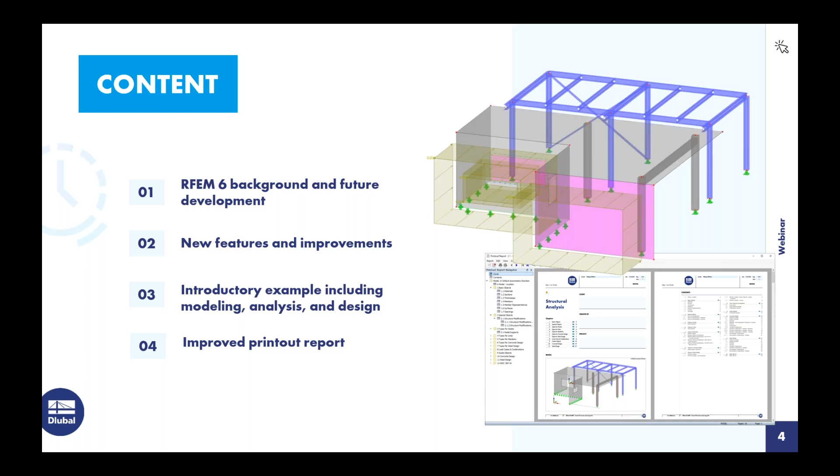RFEM 6 was released several weeks ago. It was actually developed in parallel over the past several years with RFEM 5 as well. Now, this new program generation isn't just a minor modification of RFEM 5. Actually, we have completely rewritten the program in a modern framework programming language. This is C++ with Qt. So this first release will certainly include a lot of new features, but I do want to be clear that not all of the capabilities of RFEM 5 are yet developed for this first release.

In particular, this might include glass design, cross-laminated timber, some BIM integration. So what we plan are several release phases for this ongoing development that you can expect in the coming months. What this also means is that you'll have frequent access to updates in the Dlubal extranet account. For current customers with RFEM 6 and a valid service contract, we're coming out with these updates almost weekly now because development has been so heavy and rapid with this new generation.

However, we plan to fully support RFEM 5 for this 1 to 2 year overlap period. We definitely recognize that there's many users who need the capabilities for cross-laminated timber, for example. So you can continue using RFEM 5 as you would as normal. Again, we'll continue fully supporting that until those features are available in RFEM 6, then maybe you want to consider upgrading.

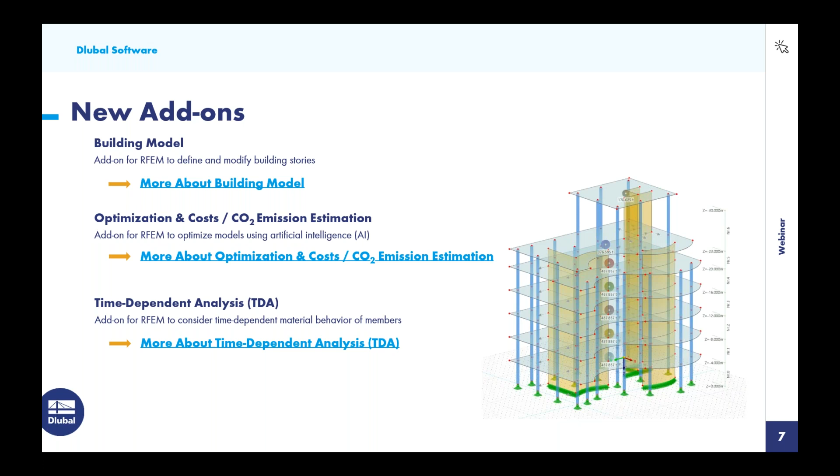To begin, we have a much better integration of the add-ons within the main program RFEM. Previously in RFEM 5, we would complete the full analysis, then move into the design portion. Now we're able to do both the analysis and the design within one workflow for a much more efficient process. You'll also see the output of design formulas from the relevant standards.

Member and member set representatives, which you'll also see in today's example, allow us to group members together. Instead of setting individual settings for each member, we can now group them together to set input such as, for concrete, the reinforcement for an entire set of columns, or for beam design according to the AISC, I can set my unbraced lengths for a group of members.

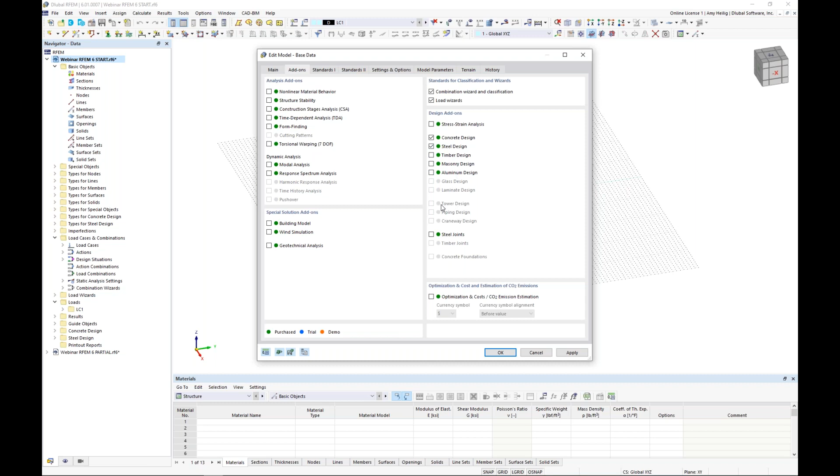For today's example, I've turned on the concrete and steel design add-ons. Some of these others that are grayed out just mean that they are in development and will be released in those future phases that I discussed earlier.

Under the Standards tab, because I have activated both the concrete and steel design, we now want to select our standard here. This is one thing that is significantly different as well. When you purchase the steel design or the concrete, timber, aluminum, and so on, you now have access to all standards. So under steel, you have access to the Euro code, the American code, Canadian, Chinese, and so on. Same concept for concrete, as we'll see here within the dropdown.

Now the load cases and combinations, this is automatically included with RFEM, so we can select one of the given standards here. Today we'll be utilizing the ASCE 7.

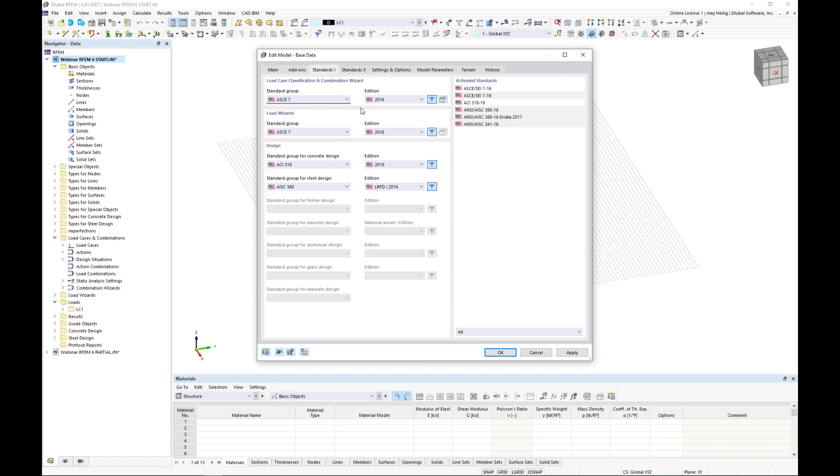Under the settings and options, this is where we would want to modify our global axes. I'm going to orient my Z axis upward, and my local axes for my members and surfaces, my local Z will be oriented upward as well.

Once we have defined all of this information, we are now brought into the main program. So we have our graphical interface here, our tables to work with down at the bottom, our project navigator, and our tools up at the top. A lot of similarities to what we saw with the previous version.

As we move along today with modeling, I'm going to point out the differences as well. You'll also notice that I'm working in a white background. When you first install, you'll find that it's actually a black background. Under options, display properties, you can control any of the colors, the font sizes, the element sizes within this dialog box.

Down at the very bottom, you can quickly load a dark background or a white background. Also at the very bottom of the screen are our grid settings. I can right click and edit this, and I've set my grid point spacing to 1 foot, and I've also set this to 50 feet on either side of the origin.

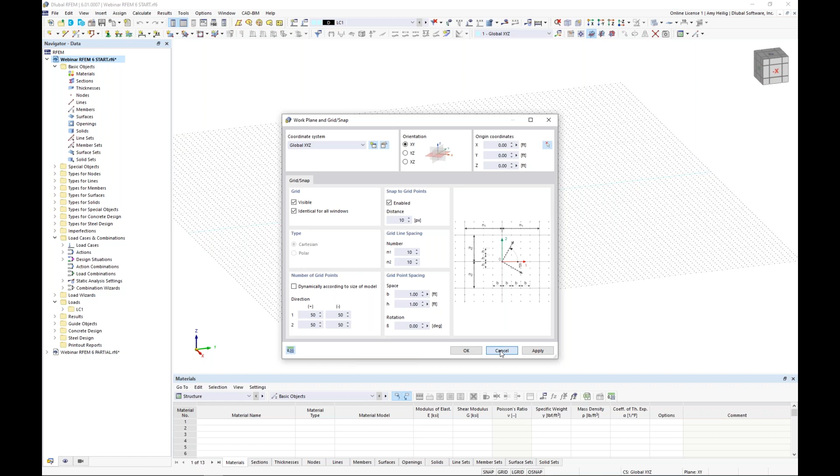Now, if we're working in a much smaller scale, let's say an FEA of a connection, we'd probably want to change this to inches, which we can access through our units and set the grid point spacing to something much smaller. Our O-snap settings, or object snaps, might be familiar from AutoCAD, where we can turn on and off different snap options, such as perpendicular, parallel, quarter points, and so on. So let us begin today by creating several nodes.

I'm going to go up to my toolbar to create my first node, and I can either select any point within my drawing grid here, or automatically put in the coordinates such as 0, 0, 0. I hit enter on my keyboard. That node is hidden here at the origin behind these axes, so we'll just have to trust that it's there for now.

The next node will be 19.5, 30, and 0. I hit enter. We can see that generated over here.

The third node is going to be negative 18.5, 15, and 0. Be careful not to move my mouse out of this dialog box, otherwise the program will automatically snap to where my mouse is currently located. So we input in that third node here, and we can right-click to exit.

So I'm going to draw my first surface, and I will go up to my tools to create a new rectangular surface. The stiffness type is going to be set to standard. Now this is something a little different: we're going to create a new thickness, and this thickness, if we launch this dialog box, will be set to 8 inches.

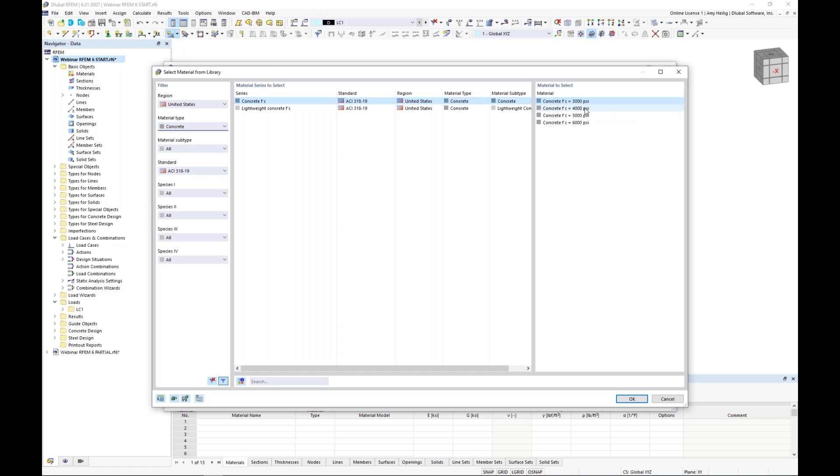We can visit our material library, and I can take advantage of my filters on the left to filter to the United States. The material type will be set to concrete, and I can choose the ACI 318 2019, normal weight concrete 4,000 PSI. Now you can see that material is set here. I click OK, and we can see the thickness and material are both generated.

Notice there are several tabs up here at the top. This is the new concept that the design portion is integrated within the main program. All of these tabs are specific to the reinforcement according to the ACI for this particular surface. In reality, we'd probably want to define this input data as well, but for now, for the sake of this example and workflow, I'm going to turn off my design properties. I'm only concerned with the analysis right now. We'll revisit this at a later time.

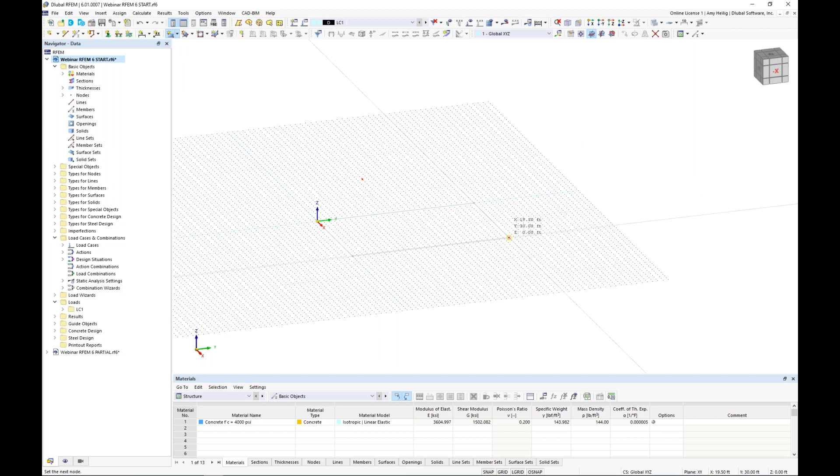I click OK, and I will snap from this origin point down here to my second node, and I'm going to do the same concept for my second surface. Now I have two continuous surfaces here. Realistically, this is the same as modeling one surface, meaning we'll have full force transfer between these two surfaces.

But if I wanted to clean up the model a little bit to truly create one continuous surface, I'll use this tool to connect my lines or members. I'll highlight over this node here to break apart this line, select this line, and hit delete on my keyboard. So now I'm just left with the boundary lines of what will be my surface.

So instead of creating a new rectangular surface, I now select my boundary lines. I do not need to redefine my thickness or material; it's already available within these drop-down options. I turn off my design properties, click OK to highlight the lines, and now we can see that we have one continuous surface here.

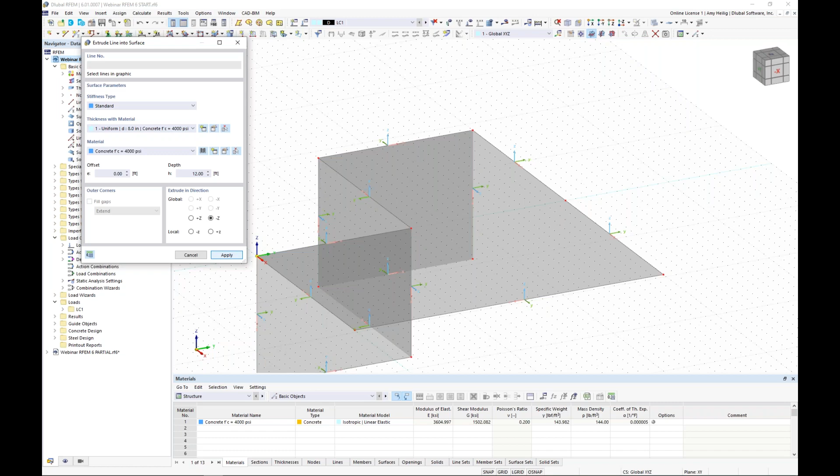I'm going to take these three lines located at the upper portion of this surface. I can right click to take advantage of this tool, extrude the line into a surface for my wall elements. I'm going to extrude this in the negative Z direction, 12 feet. You'll notice that my material and thickness can also be set here from my previous options, and now we have our wall options.

I'm going to hold down my control key to select these three walls, double click to open them, and turn off the design properties for now of these wall elements as well. So notice all of those additional tabs are now gone.

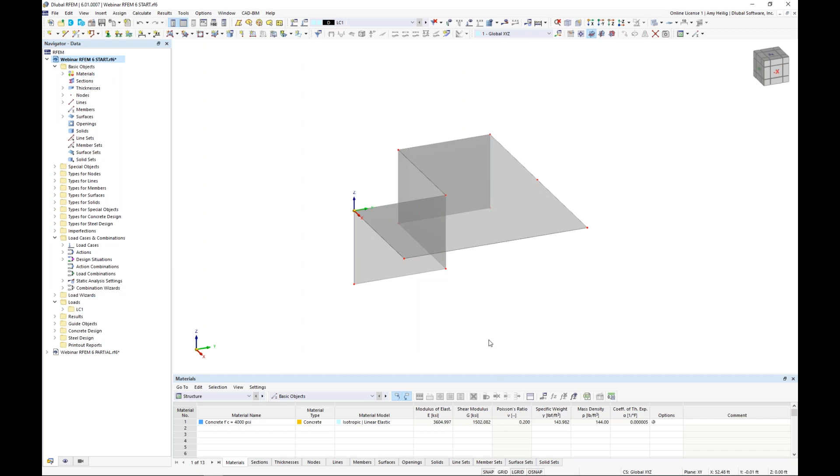Now we want to move on to drawing a few members. I'll turn off my grid settings here, and turn this into wireframe so it's a little easier to view. I'm going to create some additional nodes where I want those columns to frame into this slab element. So we'll go back to drawing a new node, and input my dimensions manually here of 16.5, 3.5, and 0. I hit enter.

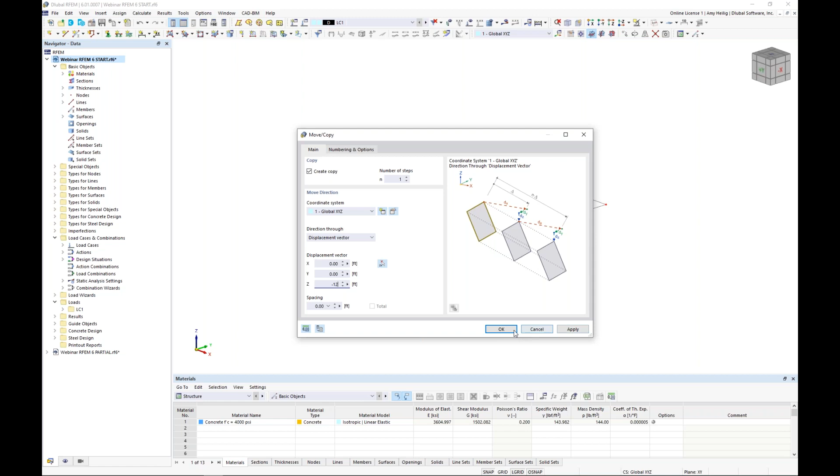I will input my second node of 16.5, 26.5, 0, and my final third node is going to be at 0.5, 26.5, and 0. Now that we have these three nodes generated, I'm going to hold down my control key, as this is where the column will be framing into the slab. I'm going to use my move copy tool, also located in my toolbar, to create one copy, negative 12 feet in the Z direction, and I click OK.

So now I've simply defined where I want these start coordinates of my columns to be at the bottom of my structure. So let us begin by drawing our first member. I can go up to my toolbar to select new single member. Now the member type is shown here within the dropdown. A beam is anything that's a typical beam or column. Of course, we have tension only, compression only, cable elements if we'd like, but for now, for this typical column, we want to choose the beam member type.

Now under the second tab is the cross section. Right now we don't have any cross sections defined. I will visit my cross section library, and we can see our steel cross sections here, which will refer back to the AISC or the CSA standard. We have some parametric thin walled and parametric massive sections.

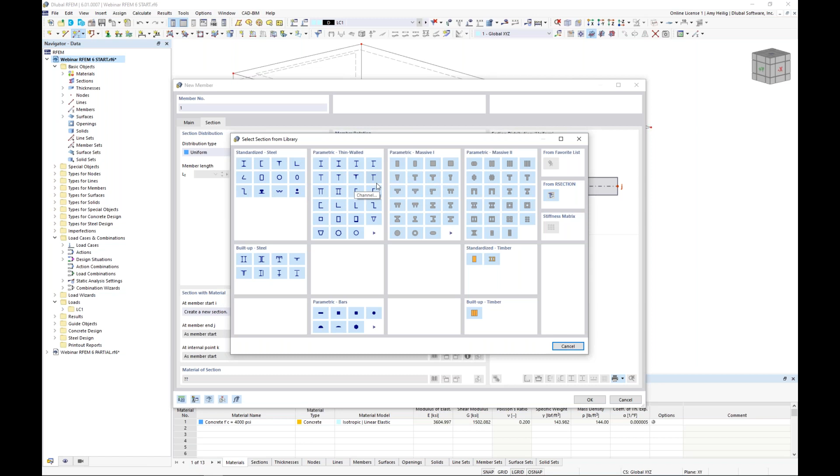For my concrete column, I want to choose a massive square. Now, I don't need to define my material. You can see I can use the same 4,000 PSI concrete, but if by chance we were defining a steel member, for example, we could set a new material here.

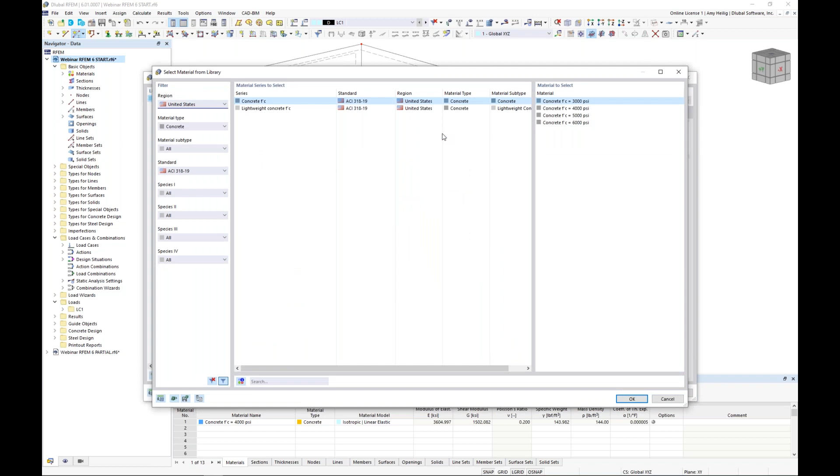By going into our material library, and over on the left, instead of concrete, we'll filter to steel, and we can choose the AISC 360. Now here are all of my materials, such as A992. I wanted to select it, and now that material will be available to us for all of our members. But of course, this is a concrete column, so we'll stick with the 4,000 PSI.

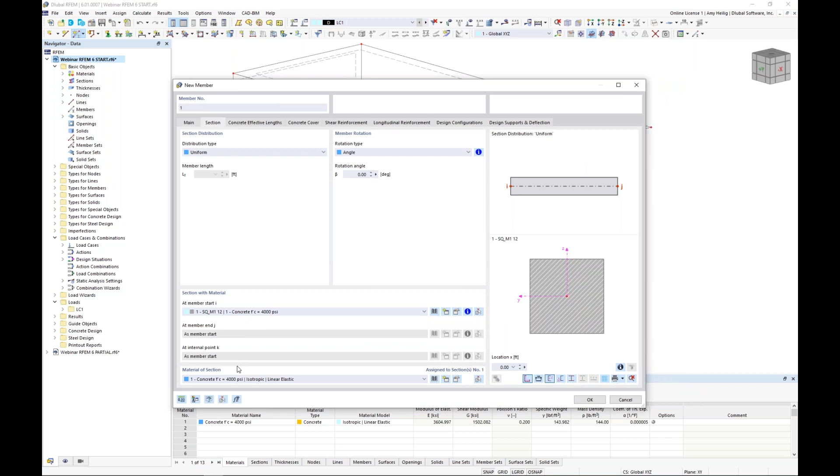Taking a look at our second tab here, this will be where we set our dimensions. So I'm going to choose 12 inches for my cross section. Under these section values, the program will automatically update to consider the cross section values calculated automatically. So I click OK because now I have defined that cross section. You'll see the material is defined here as well.

Now, going back to the main tab, we have all of these additional tabs that are specific to the reinforcement design for the ACI standard and that concrete add-on that we have activated. I'll turn this off for now, something we'll get into a little bit later, and all of those tabs now disappear. The member is considered as fully fixed when we leave everything as default here.

If we wanted to add in a moment release, we would just simply select the hinges here, and up pops a new tab where we can create a new hinge type. The program is automatically going to suggest that we'd like a moment release, so we'll release the moment about the local Y and local Z. Once we define that moment release, we can now select it at the member start and member end.

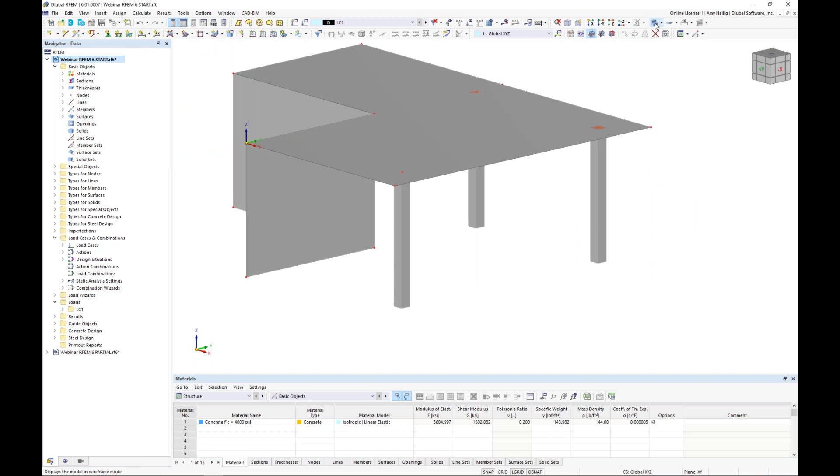Now for my concrete members, I want everything fully fixed, so I'll just go ahead and deactivate the hinges. And we're ready to snap from this bottom point up to this top point here to draw in our first column members. So I can render this and we can see those square sections framing into our slab element.

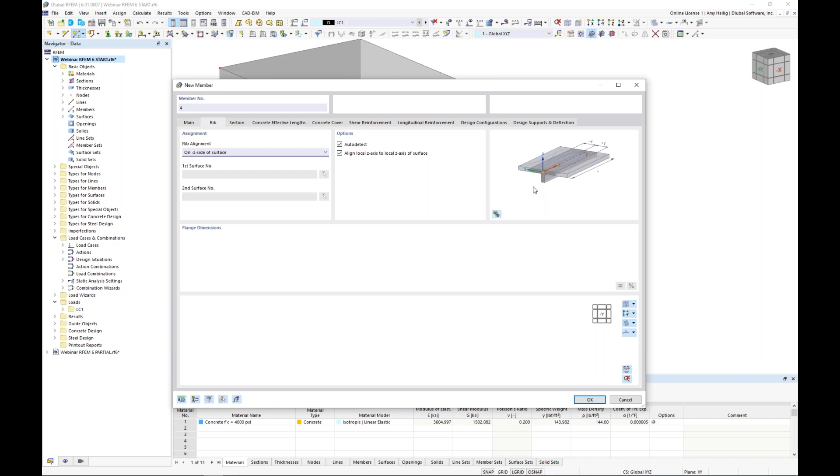Now I also want to draw a beam that spans between these two columns. So I'll come up here to draw a new member. Now the member type for this example will be beam, but we also have options such as rib. If we visit the second tab here, we have the ability to set the rib on the underside of that surface. We can design this as a T-beam according to the ACI standard, integrating those internal forces. For this example, I'll just keep this as a typical beam element.

Again, I'm going to uncheck these design properties. I do, though, under the second tab, want to create a new cross section. So I go to my section library, and instead of a square section, I'll choose a rectangular massive section, 4,000 PSI concrete. Under this second tab, I'm going to input my cross section dimensions of 10 inches by 12 inches, and I click OK. We can see that's automatically updated here.

I click OK, and it's really just as easy as snapping from the top point of the left column to the top point of the right column.

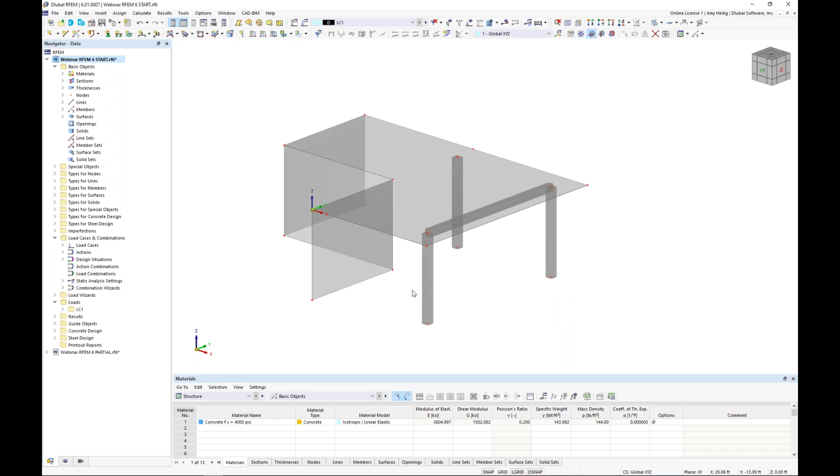So we're primarily done drawing these concrete elements for this portion of the structure. What I want to do now is to add in some openings for my wall elements. We can do this by turning back on our grid, and I want to change the orientation of this drawing grid. You'll notice I do that with my toolbar, and now my grid is oriented parallel along this middle wall. The purpose of the drawing grid is just so it confines us to this particular plane, so we're not snapping to points that are clear off in space.

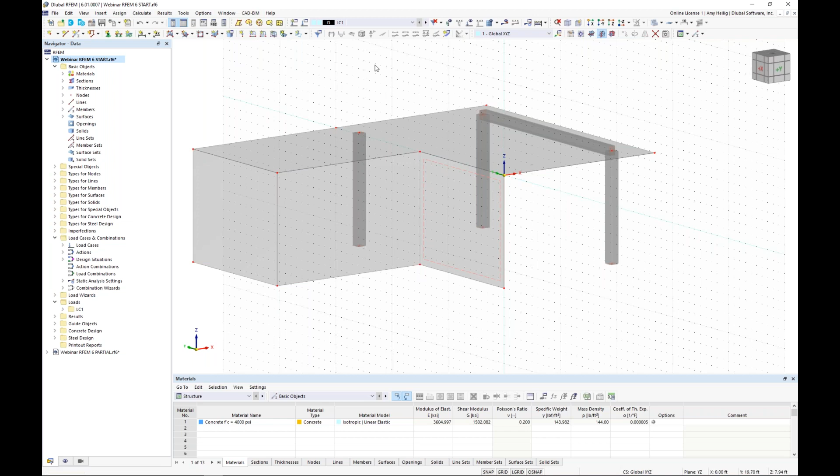This can be used for our new opening, which we can select from our toolbar here, new rectangular opening, and we just simply select a couple arbitrary points. I want to change my drawing grid now to a different plane.

And I'm going to change the origin here as well with this helpful tool where I can snap to the upper left corner of my intermediate wall. We can see now the drawing grid oriented along this plane. And now I can add in my new rectangular opening, perhaps a little bit bigger than the last one, and we can see that shown here. So this gives you a general idea of how we can model both members and surfaces within the program.

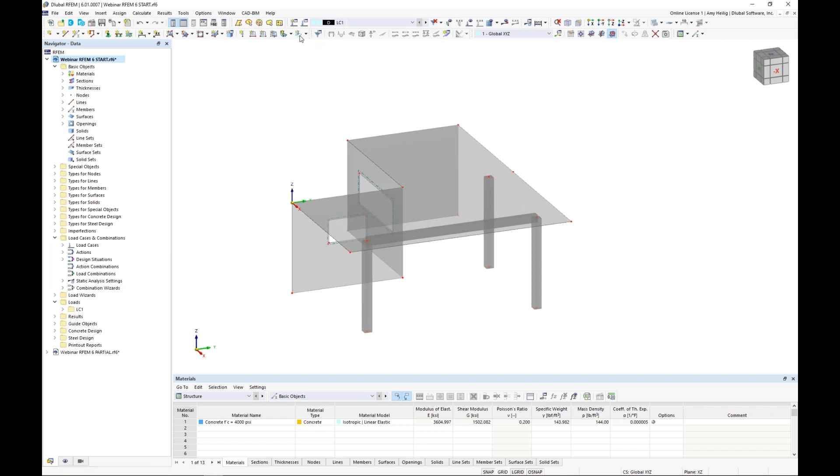Now, for the sake of time, I am going to jump to an already saved model here where I went ahead and modeled all of the steel members as well. Again, the exact same process can be followed. Maybe you'll notice here a couple of differences.

Well, first of all, I'm displaying the cross sections according to these various colors. And we did this under the project navigator over here. You can scroll all the way down to the bottom where we can change the colors according to the member section, just for a clear look at exactly what cross sections we're using.

All W sections except for my cross bracing here, which you can see I defined as tension-only members and single angles. Notice the hinges is grayed out here. For some of these options like tension only or compression only, we're going to assume that you have a moment release, so that's actually applied in the background.

You'll also notice that I have these main members here on the left and right hand side with these intermediate members framing into the weak axis. These are applied along these particular nodes. This will come into play a little bit later on when we have a discussion about unbraced lengths.

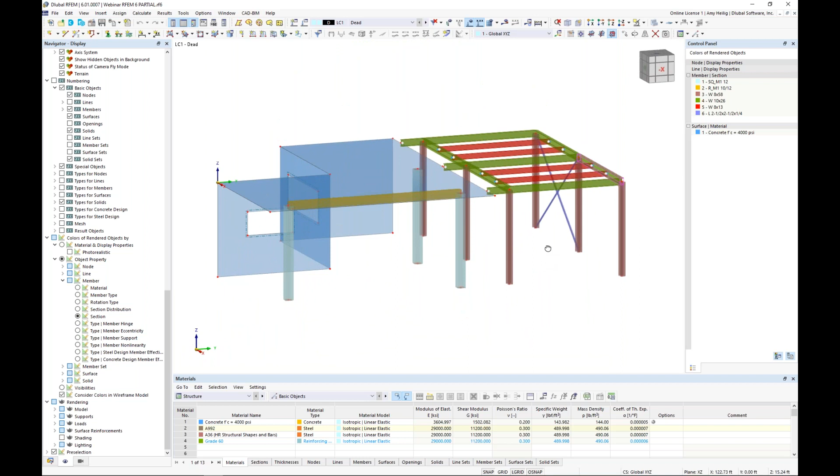So what we need to do now is support our structure now that all of our members and surfaces are modeled. We'll come up here to our new nodal support, and we create a new nodal support definition. We have here 6 degrees of freedom, 3 in translation, 3 in rotation. The program automatically suggests we want some type of pin support, so we will restrain translation and we will go ahead and restrain rotation about the global Z axis.

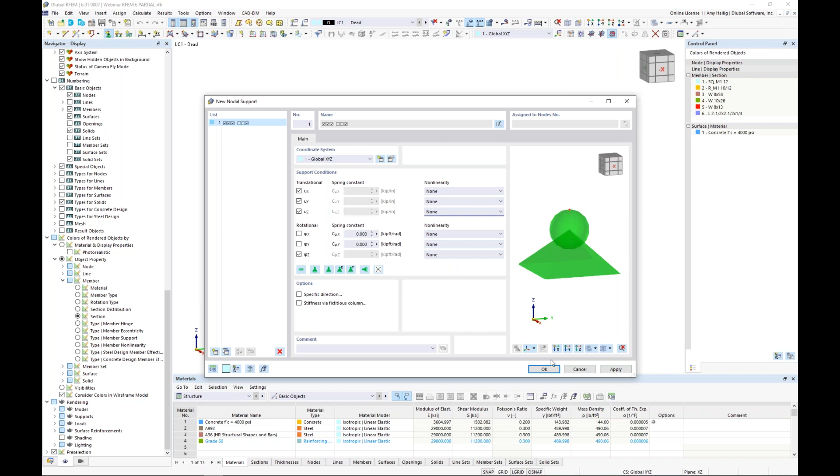Now there is the ability to define partial fixities with a spring constant or nonlinearities as well. So for example, if you want this support to fail in uplift, that's also possible. So defining this simple pin support, I click OK, and now I just need to highlight over the bottoms of all of my columns, and choose this column over here on the left-hand side.

The line support for the bottom of the walls follows the exact same concept. We're going to create a new line support definition, and we can see our 6 degrees of freedom. For a line support, we only need to restrain this in the translation directions.

I click OK, and you can see here that I can go ahead and select my lines, and I'm going to select the bottoms of my walls, so I can graphically select those. I click OK, and now we can see the line supports at the bottom there.

All right, so modeling is essentially complete. Let us move on to loading. For this, you'll notice that I do have my drop-down box here with one default load case already defined.

So let us go into the Edit Load Cases and Combinations dialog box. The first tab here references what we have already set in that base data. We are going to generate our load cases and combinations according to the ASCE7. I have activated this combination wizard here. Under the load case, the first load case defined is dead load with the action category dead according to the ASCE7. Notice self-weight is active here, -1 in the global Z direction.

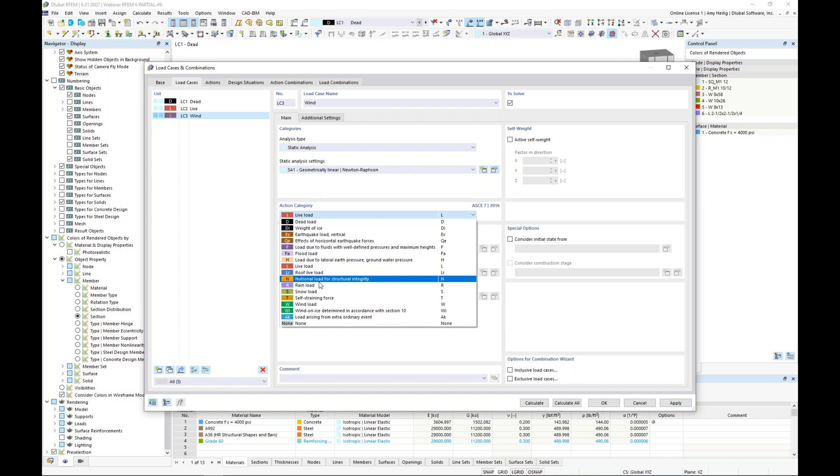I'm going to create my second load case, which will be live load with the action category set to live. Notice self-weight is unchecked here because we do not want to account for it twice. And finally, my third simple load case for today will be wind load with the action category set to wind. All 3 of these load cases are set according to a first order linear analysis, which is typically fine for load cases.

So then we jump to this design situations tab, and this is somewhat of a new concept within RFEM 6. We have 2 design situations created here, our LRFD and ASD. Now we know LRFD is going to be all of our factored load combinations, and ASD is going to be all of our unfactored load combinations.

You can see that I have activated these for both concrete and steel design. This will come into play a little bit later on for the design portion of the structure.

Under the load combinations, this is where we will see our load combinations individually listed out based on the load cases we've defined. Here in orange are my factored load combinations, and here in red are my unfactored load combinations. Now, all of these are run according to a second order analysis, so both big P delta and little p delta nonlinear as well.

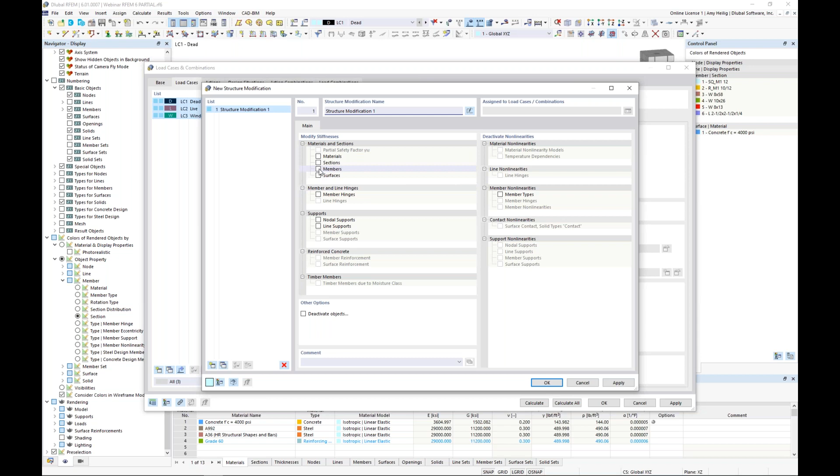Before we move on, there's one more topic I want to discuss. For this, I'm going to select all of my load cases here and activate what's called the structure modification. With this structure modification, we want to create a new definition here. I have the ability for several options, but I'm going to focus on the modify stiffnesses for my members and my surfaces. Now we get 2 additional tabs.

Under the members, this is where we want to use our drop down to define a new stiffness modification. When you are working with either the US or the Canadian standards, concrete or steel, these are both relevant. Topics such as the I cracked factor for concrete are not by default applied to these elements. We need to come in here and tell the program to modify the stiffness for the analysis to apply this I crack factor. So we'll select the ACI from the drop-down box.

We will select our columns to apply an I crack factor of 0.7 to the bending stiffness. I click OK, and then in this second cell is where I can graphically select all three of my columns that this I crack factor will apply to.

In a similar fashion, I choose a new member stiffness type according to the ACI, but this time I want to choose beams for a different I crack factor of 0.35. For this, I am going to graphically select my beam element here.

Now, the third definition is going to be related to the AISC 360. For steel design, we know that if we are designing according to Chapter C and the direct analysis method, we need to apply this tau sub B as well as this 0.8 stiffness reduction factor to our members. I'm not going to get too much into the details with this - we can cover these in later webinars specific to steel design, for example - but we do want to apply these stiffness reduction factors for our steel members. Therefore, we will graphically select all of our steel members here.

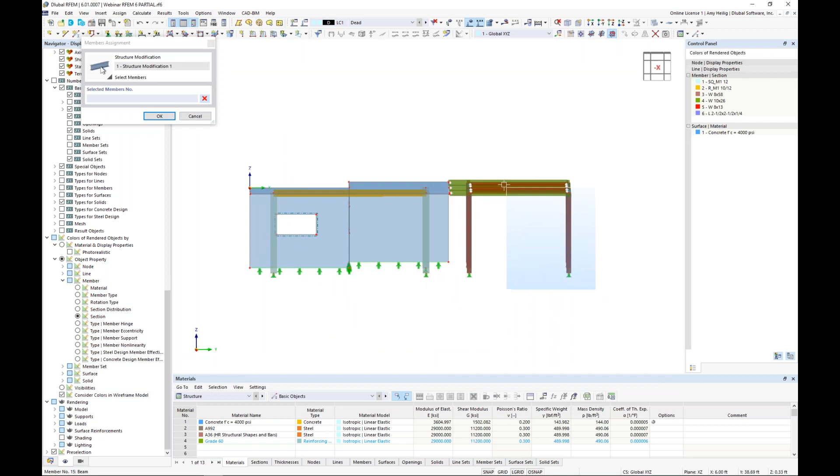I click OK. Then under the Surfaces tab, we want to create a new definition. We're going to jump back to the ACI, and this time, we want to choose the option Walls Uncracked for a stiffness modification I crack factor of 0.7. I click OK, and then under my surfaces, I'm going to select all of my wall elements, which there are only 3.

For my second definition here, I create a new stiffness modification. This one is going to be according to the ACI, and for flat plates and flat slabs, an I crack factor of 0.25. We're going to select our only slab element here, surface number 1.

So now I have applied these stiffness modifications to be considered for all 3 of these load cases. Under the load combinations, we need to highlight all elements. I activate the structure modification. I don't need to redefine - it's already available here within my dropdown.

But this is important - if there's this scenario where you don't want to reduce the stiffness for serviceability, for example, well, maybe we uncheck these options for unfactored load cases. So many options there, but for now, we'll keep everything active.

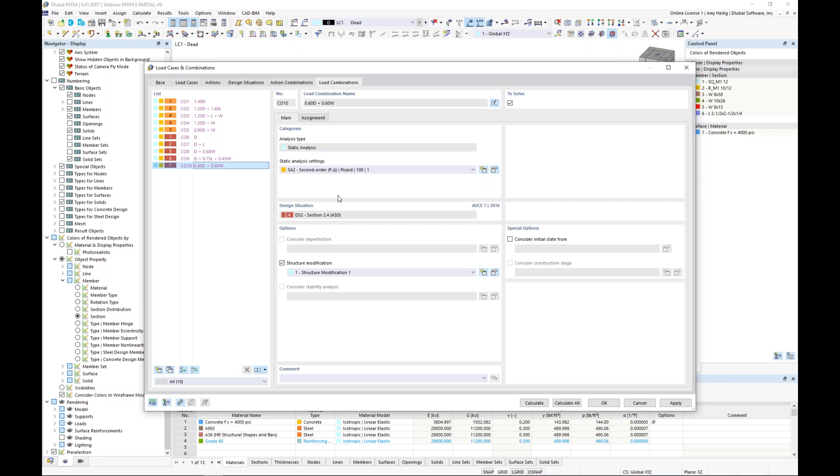Okay, so now that we have defined and set up all of our load cases and load combinations, we can see these reflected here within our dropdown, and we're now finally ready to actually apply the loads to the structure.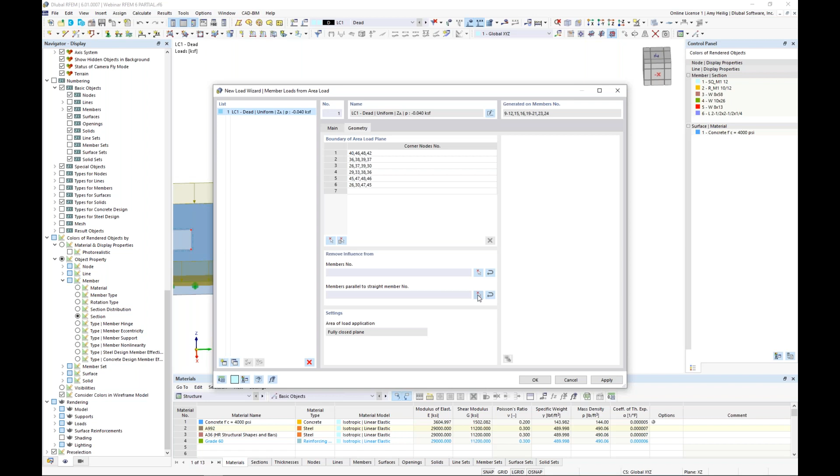Now, if I want to remove the influence of this area load for any of these members, because we have a one-way area load distribution, I can choose member number 11, and tell the program I'd like to remove the influence of all members that are parallel to it. So now when I click OK, we'll see our area load applied.

But we can take this a step further by right-clicking and displaying separately. So now we have neglected the influence from all those members framing along the global x-axis. All the tributary areas are automatically considered, and we have our nice member area load shown here under dead load.

A couple nice new features within RFEM 6. If we wanted to adjust the size, we can simply right-click on the load, and you'll notice that size can either increase or decrease depending on this sliding scale here.

Additionally, if we add in this area load and we're thinking, oh, we really meant to apply that to live load, it's really not a problem now that we can easily double-click on the load and change the load case within this drop-down box here.

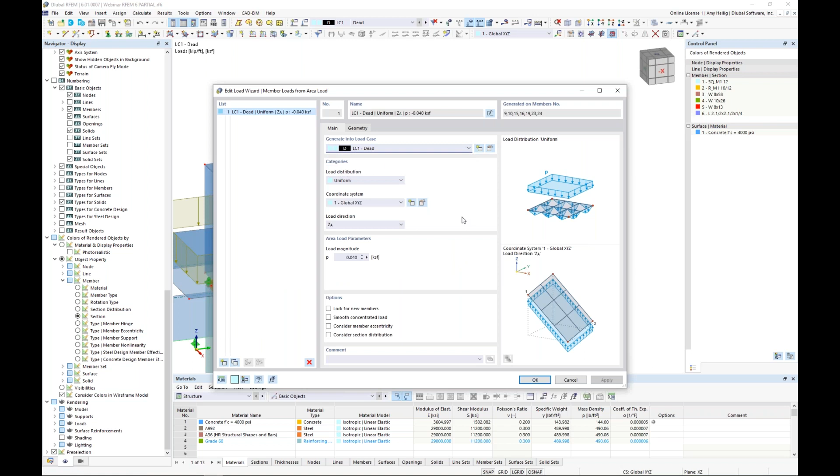Okay, so that will wrap up dead load, and we want to move on to live load. Now for my live load, I'd like to apply a load to my surface, but not the entire surface area. So what we can take advantage of within our drop-down box at the top is the new free rectangular load. This allows me to specify a magnitude of -0.1 kips per square foot, and I'm going to assign this to surface number 1.

I can graphically select it, or I can just type in number 1 here. And then I can choose my coordinate points of where this load should be located on the surface.

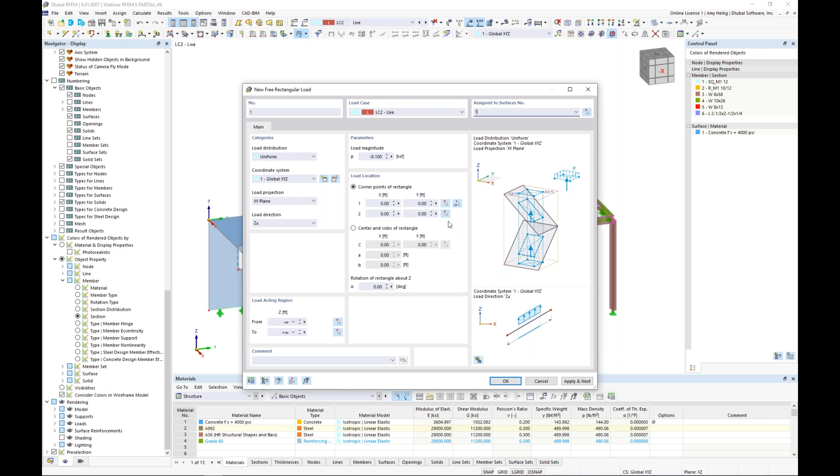Now we have the ability to project down this load over several surfaces. For example, if you have a multi-level story structure where the live load occurs at the same location at every single story level, you can apply this to multiple surfaces at once, and the load will be projected down through that elevation. So for this, I'm just going to select surface number 1.

I'm going to choose my upper left corner point here and my lower right corner point here, and the coordinates are automatically updated. I click OK, and now we can see that live load applied to only a partial area of the structure.

Now for my wind load, we just want to have a basic application in the lateral Y direction. So I'll start off with a new surface load, in the global Y direction this time, with a load magnitude of 0.03 kips per square foot. I click OK, I can graphically select this surface, click OK once again, and we see our simple lateral load applied to this wall.

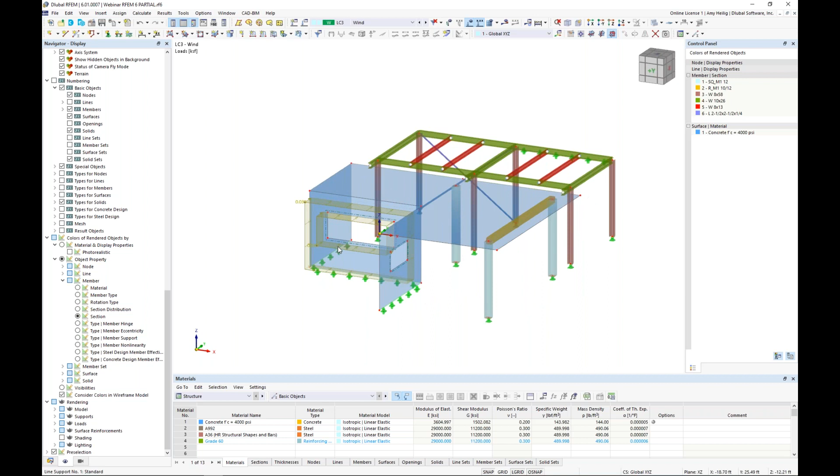But we might be asking ourselves, well, we're certainly going to have a window in this area that will be essentially distributing the wind load to the outer perimeter here of this surface. So how do we consider that? Well, we've also added in a new quick feature here called new opening load.

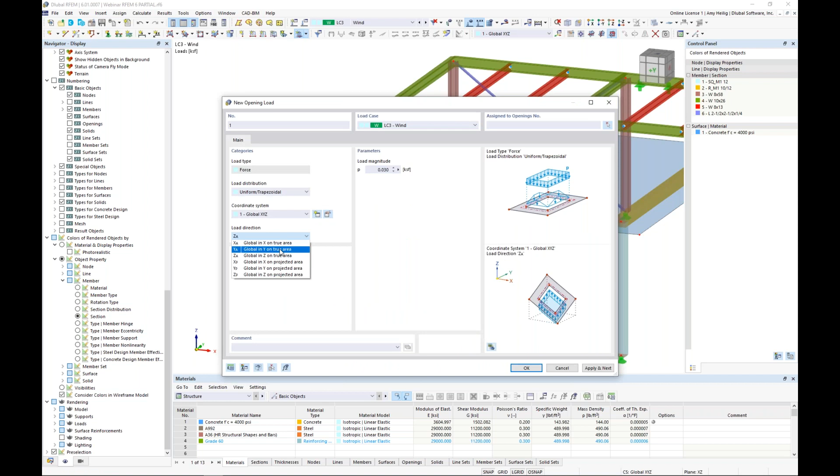So we launch this dialog box, we simply type in the load magnitude again, 0.03 in the global Y direction. We click OK, and we can easily just click on that opening. Now we can see that load applied to the outer perimeter of that opening.

In a similar fashion, let's consider that maybe in this entire open area here we have some type of facade wall. We didn't model the facade wall because it's not really contributing structurally to this particular model, but I'd like to consider it for wind loads.

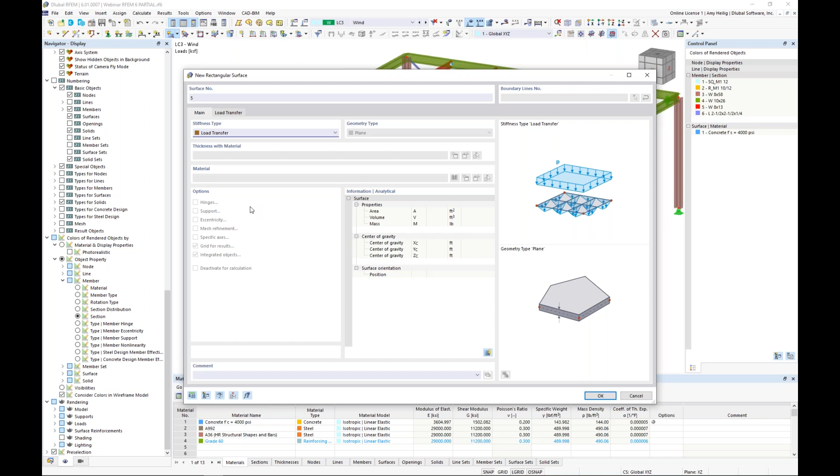I'd like to introduce a new feature available under our surfaces option: the new rectangular surface. Now the stiffness type, instead of standard, is set to load transfer. This surface type, as the name implies, is used to transfer loads. It does not add any stiffness to the model. You'll notice the thickness, the material, all of these options are grayed out. It's really just a tool for area load distributions.

If we jump to the load transfer tab, we can set either a one-way or two-way area load distribution. We'll set this to both directions. You can add in a surface weight, and you can consider many other options here within this dialog box. When I click OK, I'm going to draw this new surface by turning on my drawing grid.

It's already oriented in the plane that I'd like it. I'm going to snap from this point at the bottom of my structure up to the top of this structure. Now we can see that new surface applied here, shown in red.

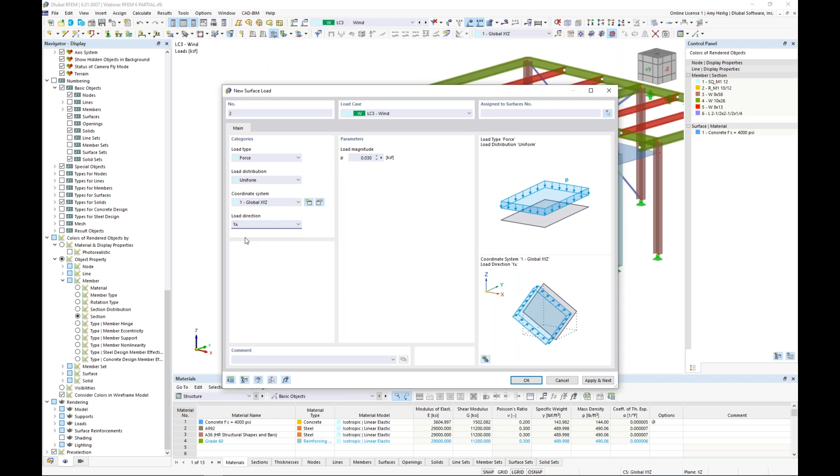Again, I'm not adding any stiffness, material, nothing. It's really just used so that now I can go to my new surface load, apply a load magnitude of 0.03 in the global Y direction, just like what we saw with the previous wall before. I click OK, and I can now highlight this new surface and see that load applied here.

If we're curious what's going on in the background, we scroll up to our navigator, under display options. These display options just control everything I'm seeing visually - we can turn things on or off, or change the display type settings. Under the basic objects for surfaces, we can turn on the display of the load transfer separately, so now we see these line loads being distributed to the structure.

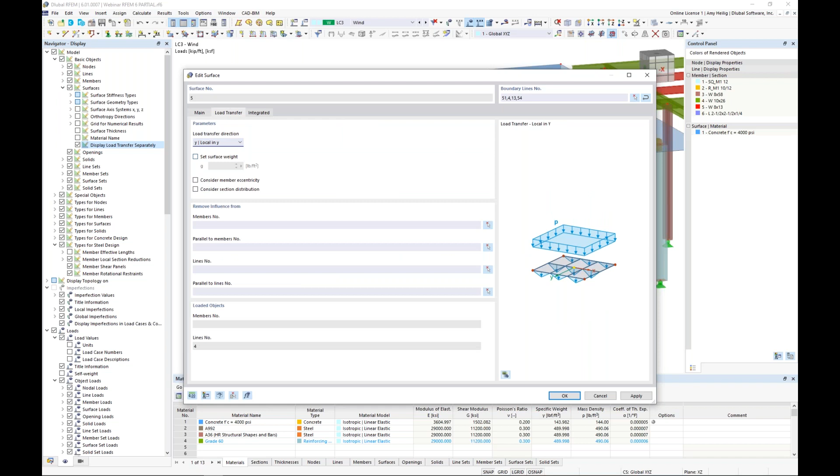We have a single vertical line load and a horizontal line load. If we decide we'd really like a one-way area load distribution, no problem - just double click on this surface, and under the load transfer, let's change this to the local Y direction instead. I click OK, and now we see a single line load oriented here towards this top slab element.

Okay, so now we have defined all of our various loads. We can view them displayed together for all of these different load combinations, considering the relevant load factors. A few more things to take care of before we're ready to run that analysis and design.

The first is the FE mesh settings. So under calculate, mesh settings, this is where we choose our target length of our finite elements. You can see I've set this to 1 foot. So now when I click OK and apply, the program says line number 34 cannot have a line support assigned.

Let's go to the table here. It says I have a line support assigned to line 34. Let's go ahead and turn that off. Okay, going back to calculate mesh settings, 1 foot, we click OK and apply, and now you can see that the mesh is going to be generated here.

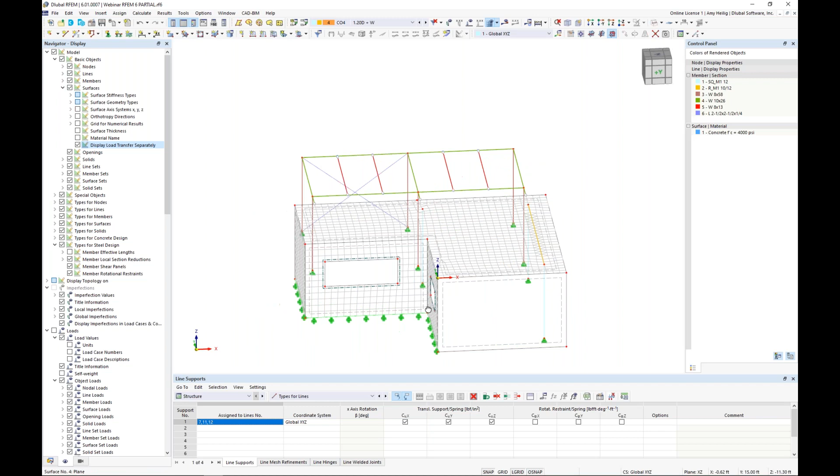Let me turn this into wireframe view. The program will automatically generate this mesh - it will tie it into all of the relevant openings, the nodes, the members, everything automatically for you. So everything looks quite nice here. Of course, we'd want to modify those mesh settings depending on how large or small our elements are within our model.

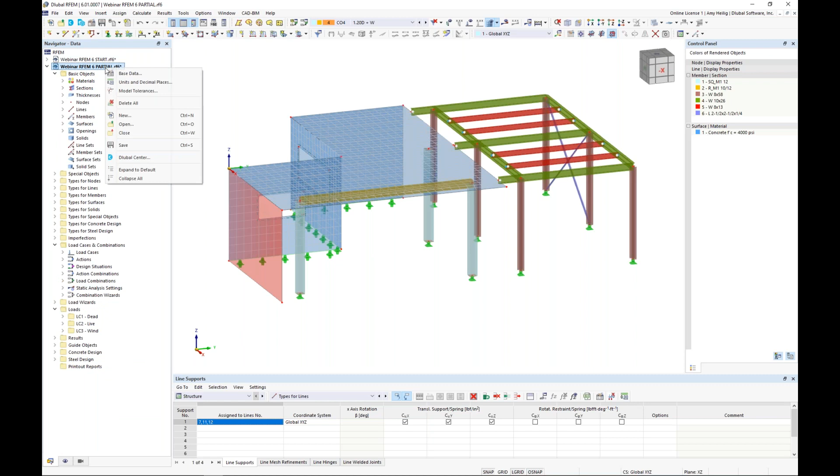Okay, now that we've addressed most everything related to the analysis, I'm going to jump to the design. Remember, the huge advantage of these integrated add-ons is the ability to do the analysis and design together. So let's start by going back to our base data, and I can right-click here under my base data to launch that dialog box. Under the settings and options, we now have what's called the member representatives.

And you can see now we have an additional tab shown here. So when I go back into RFEM, I'll turn this into wireframe view and turn off my mesh settings to make this more clear. You'll see all of these different color codings here. The program has grouped together members that have similar materials, cross sections, and lengths, which we can also see in our navigator.

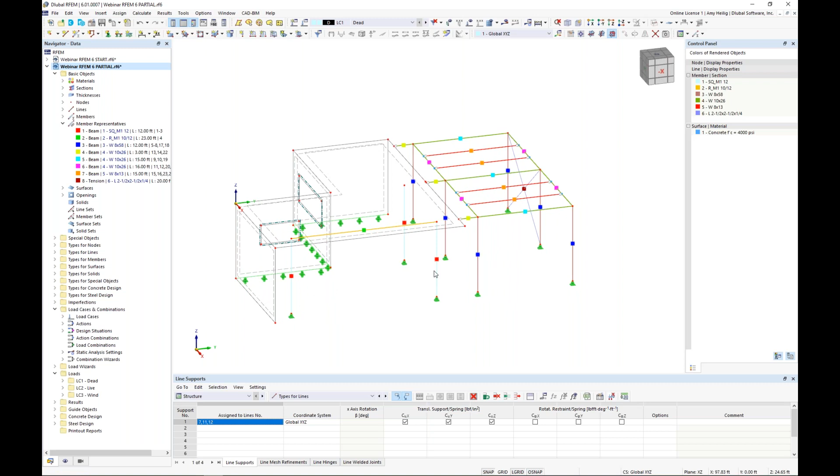This is really helpful for the design aspect. You'll notice I have my 3 concrete columns indicated by this red member representative. If I double click on it to edit it, it brings up my member representative dialog box, and you can see that this includes members 1 through 3.

So I'm going to go to these edit member settings. If you remember way back when, we had deactivated these design properties, so let's activate those again. We see all of our various tabs along the top here. But I am not going to change the reinforcement settings for each individual member. Rather, when I click OK, notice my member representatives have the exact same tabs, so this allows me to set the same reinforcement for all 3 of my columns at that floor together.

If I were to make any changes, I come in here to the member representative to make those changes rather than each individual member, and every member associated with it - for our example today, members 1 through 3 - will automatically be updated. So how is this relevant?

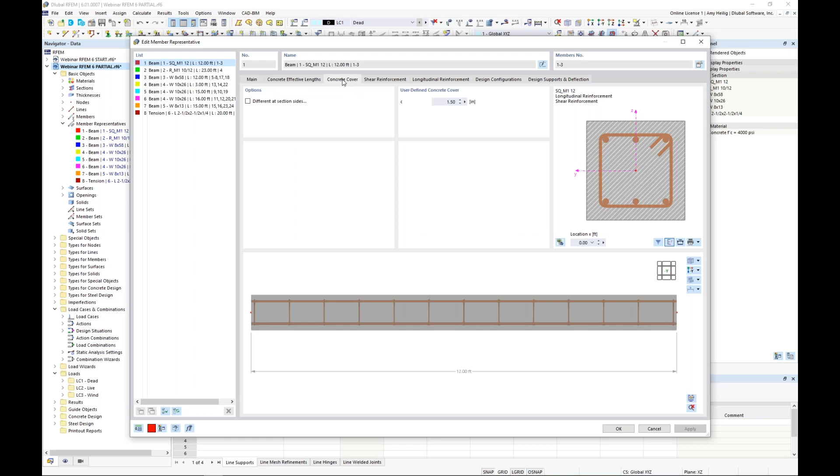Let us take a look at some of these tabs here. For example, the concrete cover - we can set this to 1.5 inches.

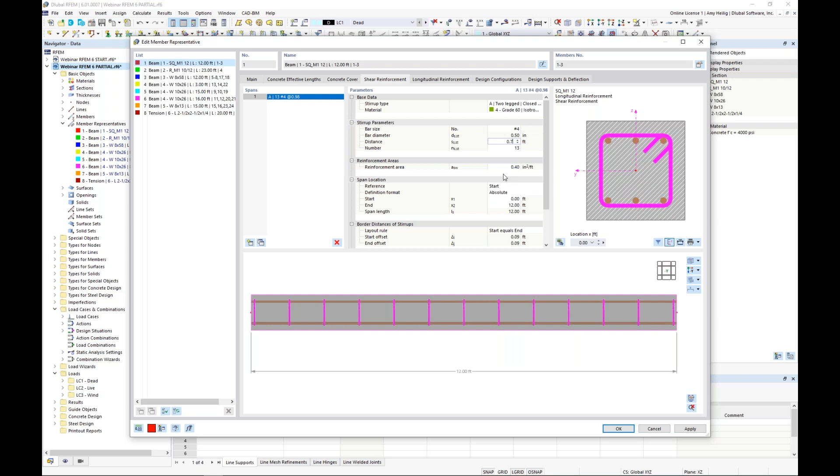The shear reinforcement, this is where we want to initially define our material for our rebar. We would typically need to go to our material library, and we can visit it using our filters over on the left. We can set this to reinforcing steel according to the ACI, and we choose grade 60. Once this material is set within RFEM, we can now select it here for our shear reinforcement, and perhaps we'd like to use number 4s with a spacing of 0.75 feet or 9 inches. Now you can see that this nice picture updates here with our shear reinforcement.

Longitudinal reinforcement, same concept. This time though, we will select a uniformly surrounding distribution, and we're going to leave this as grade 60. We'll select 8 bars and choose number 7s from our drop-down box here, and again this picture will update automatically.

I'm not going to get too much into all of these details. Again, we'll cover this in some additional webinars where we can spend much more time on concrete design.

The design configurations, this is specific to our ACI design, since we've activated that concrete add-on. Of course, we want to do design according to strength and according to serviceability. Inside these details are all of these different settings specific to strength design according to the ACI that we can adjust, turn on or off, or maybe we don't touch them at all.

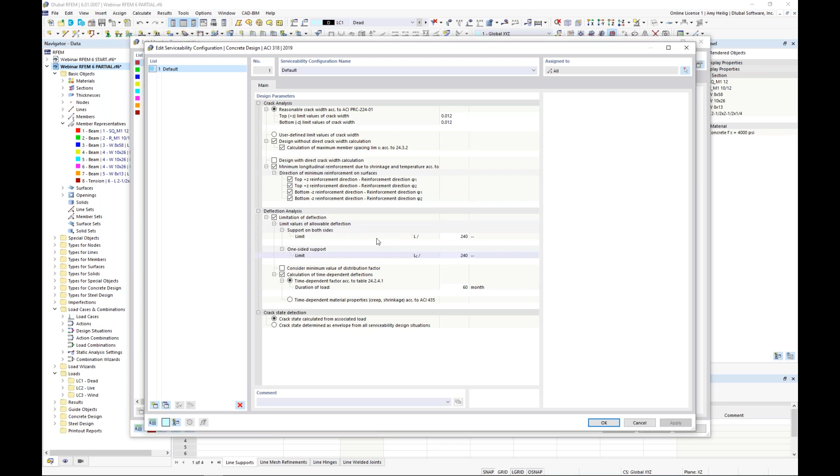The same concept applies for serviceability. Serviceability related to the ACI covers things like crack analysis, shrinkage and temperature for our surface reinforcement, as well as deflection. So we can set our limiting deflection ratios here for our concrete elements.

So once I have set this reinforcement, I can click OK, and you'll notice here that my reinforcement is now shown visually for these elements.

In a very similar manner, we want to design a few of these steel members. So I am going to double click on this pink member representative, and you'll notice that this includes members 11, 12, 20, and 21. Just like what we did with the concrete columns, I'm going to go in here under my edit members and turn back on those design properties.

Now we have these additional tabs up at the top that are specific for AISC design, such as unbraced length, a very important topic. But again, I am not making these changes here for each individual member - I'm going to set them within this member representative.

So if we take a look at the design types here, the initial setting is the effective length, so we want to create a new effective length. This covers unbraced lengths for weak axis buckling, strong axis buckling, lateral torsional, and flexural torsional buckling.

All again, very important topics. Under this second tab, the program automatically sets the nodal supports at the member end.

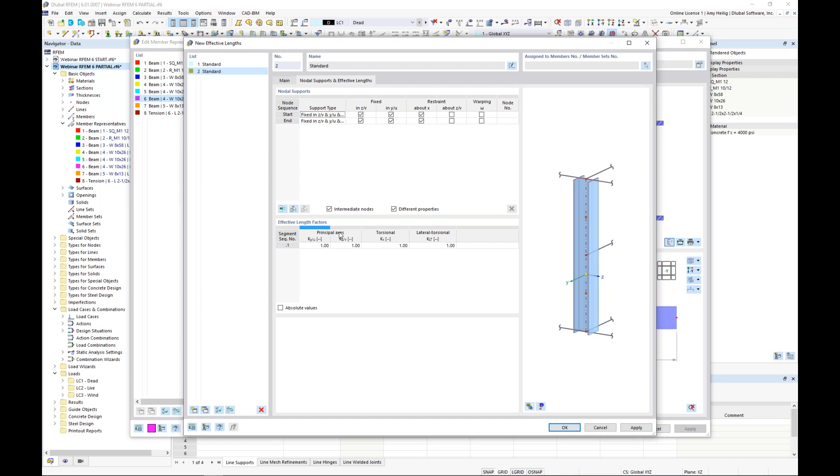But remember, we have these additional smaller W sections framing into the weak axis, and I want the program to automatically detect these members rather than having to manually set that unbraced length. So I can check on this intermediate nodes, and then I can graphically select member number 11. You can see those smaller intermediate frames framing into the weak axis direction. The program says, okay, I see those intermediate nodes. And now I can tell it, it is braced in the weak axis direction, the local Y direction.

Additionally, if we only had bracing at the top flange, or it was only braced at the bottom flange, we could set an eccentricity type down here at the bottom. By default, it will be set to both flanges braced in that weak axis direction. This was something available for AISC in RFEM 5, but not for the CSA S16 standard, but now all standards will have access to this option.

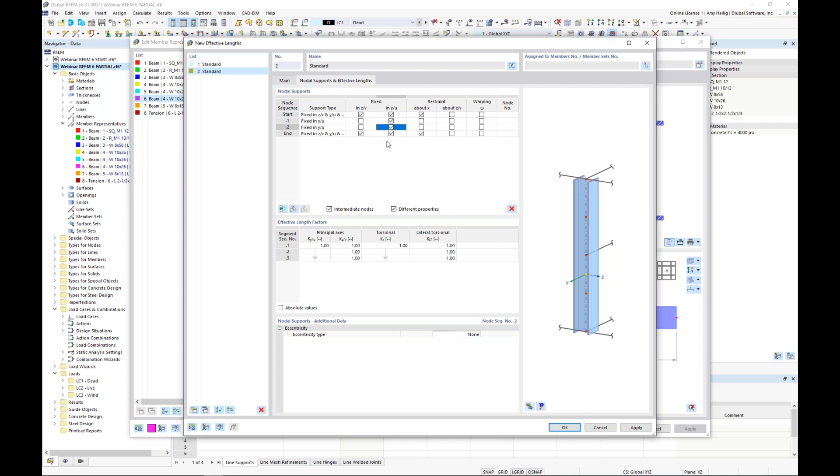So now when we go ahead and take a look at the member after we hit OK, we're going to see those intermediate supports shown here that represent the unbraced lengths.

Design configurations, same thing we saw with the concrete, but this is specific to the AISC for steel. So we go into the strength configurations, just a few settings here related to the member design. For AISC, serviceability, same concept. All we're going to see here is our limiting deflection ratios where we can set.

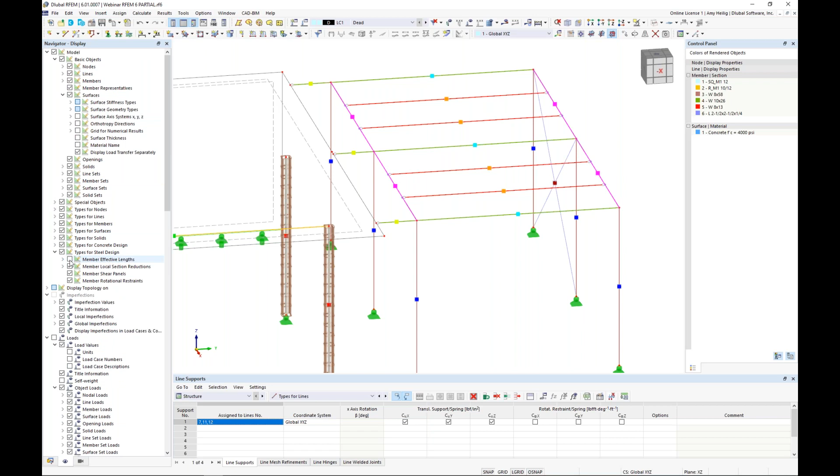So now when we click OK, I want to show you guys graphically that under these display settings, I can turn on the member effective lengths under the types for steel design, and we can actually see these visually shown here. Now, if I make any changes to that member representative, these intermediate supports will automatically be updated for all 4 beams. So really important to take advantage of those member representatives rather than modeling for each individual member.

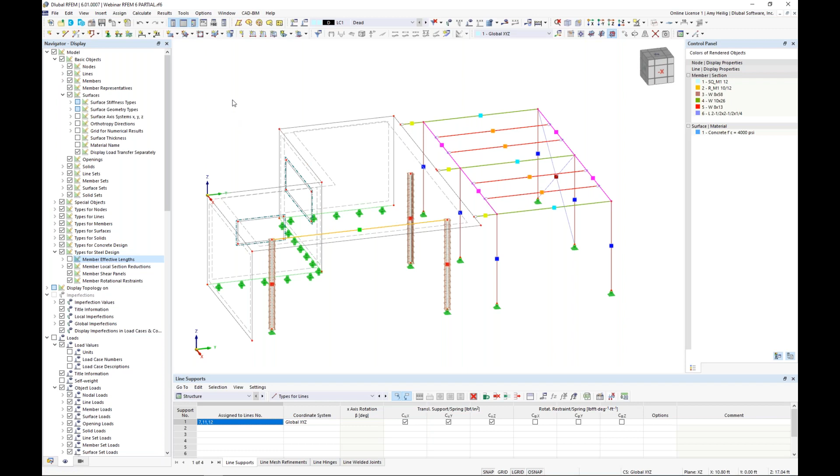Okay, so we are now finally ready to run our calculation. I'm going to go to calculate, calculate all. This is going to show you guys the multi-core processor where multiple load combinations are solved at once for both the concrete and steel design as well as the analysis. And you can see that solves very quickly.

So what we are presented here is a new tab under our navigator for our results, and we can scroll through to our different deflections for our various load cases and combinations. We've also moved all of these display settings related to the results right here within the navigator results tab as well. So for example, the deformations - if I want to turn on the members and adjust this to the sections that are colored instead rather than line elements, I can do so here.

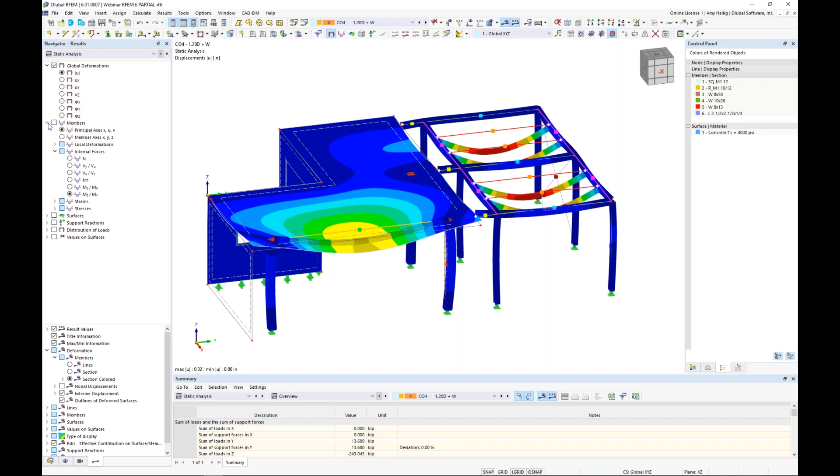We're probably also interested in member internal forces. So for example, I can activate this. I can view my axial forces here. I can view my shear forces. Maybe I'm interested in my bending moments.

But all of this information can also be shown to us in what's called a result diagram. So for any one of these members, I can right click, and under the members, I have the ability here to launch the results diagrams. This is the same information I was just viewing, just in a little bit more detail along the full length of the member.

I can add this information to my printout report. I can scroll through to some of the different load combinations. And something that's new within RFEM 6 is that I can drag this over to a separate monitor and work in RFEM at the same time, and everything will update in real time.

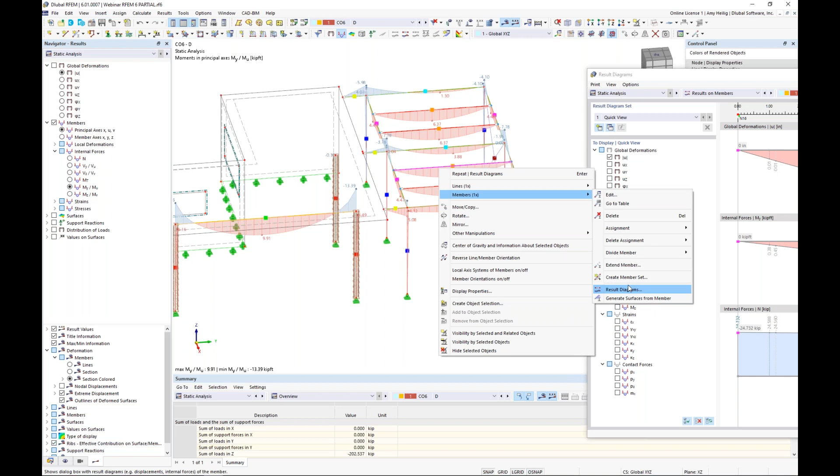So for example, if I change my load combination here and instead want to take a look at my result diagram for this beam, I can jump here to my member, to my result diagram, and you'll notice that everything updates here on my second window.

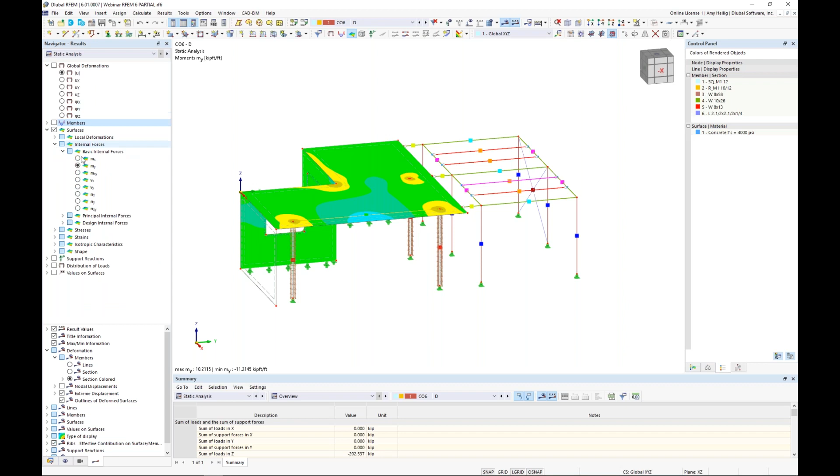All right, so that will essentially just give a brief overview of our analysis. I also should mention that our surface analysis information is available to us here within these different options, including internal forces. Let us talk about the design.

So currently we're looking at the static analysis, but we can use this dropdown to choose the concrete design instead. So we no longer have this separate application of analysis then design. Everything is here together.

Now, one thing I wanted to adjust here - let's jump back to the concrete design, and I'm going to go back to the input data. I forgot to do this to begin with, and this is really, really important. Under the design situations, you can see my LRFD load combinations are related to my strength design. But my unfactored ASD load combinations - remember these two design situation types - I want to relate this to my serviceability instead. The program says, okay, I need to redo those results. That's fine.

Notice here that seismic has also been added according to Chapter 18. So this is probably something we will want to go in and adjust to make sure strength and serviceability are assigned to the correct design situation types.

Also, under objects to design, the program will automatically default to everything. If we only want to design, let's say, certain members within the program - let's say our 3 concrete columns here - we can graphically select them, members 1 through 3.

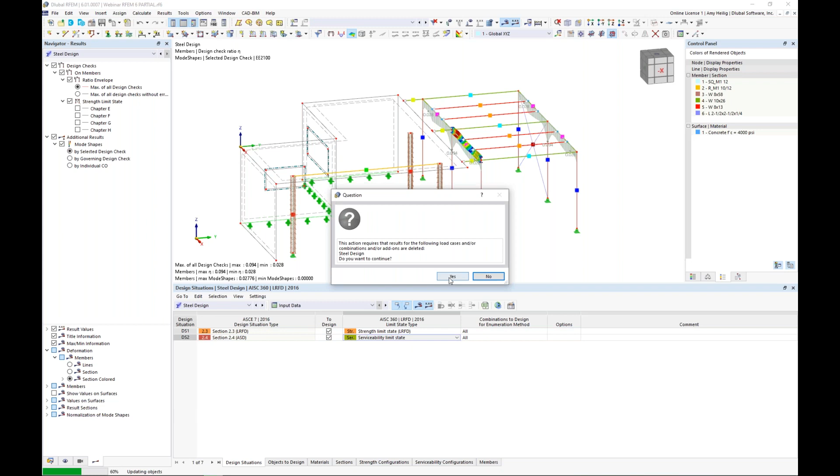Within my steel design, same exact concept, but I want to jump back to my input data. Under the design situations, my LRFD is going to be assigned to my strength limit state, and my unfactored ASD design situation type will be set according to my serviceability limit state design.

Objects to design - I really don't want to design everything here. I mean, we can, but we haven't input all of that information except for our 4 members here. So we're now designing these 4 members, and let's go up to calculate all again. It's already run through the analysis, so you'll see the concrete and steel will just quickly solve again.

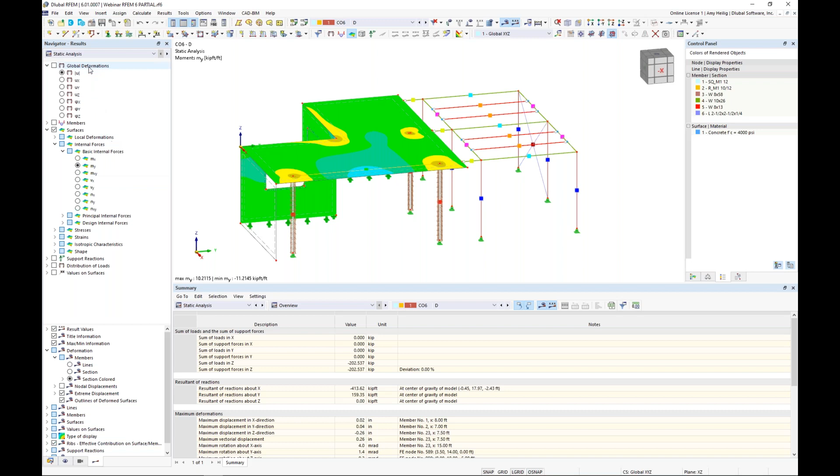So now we have already discussed the static analysis results, but we're going to jump here to the concrete design. You'll notice that my navigator updates accordingly. I'm currently viewing all of the various design checks here, but I want to focus on this table where I can view the design ratios by member.

You'll notice here that I can automatically look at all of the various checks according to the ACI. The program syncs in the background to show me exactly where I'm at for that controlling internal force for that member. Now we can take this a step further for any one of these checks according to the ACI.

To launch what's called our concrete design check details - so this is what I had mentioned in the PowerPoint, where we're now going to show you all of the formulas, we're going to show you the variables. We can add this information directly to our printout report as a graphic. We also can select any one of the other checks here just to take a look at the various formulas that are really coming into play for this ultimate design ratio that we're viewing here.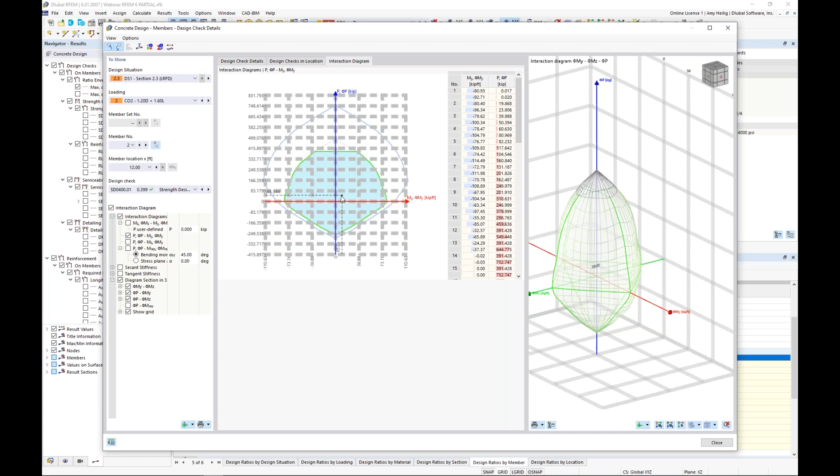Now, the long-awaited interaction diagram is now also available. So I can activate this interaction diagram, and I have an additional tab here that shows the 3D interaction diagram for both axes of bending as well as the axial force. It will show you exactly the point that you land on with this particular column. Again, we can add this information to the printout report. So this was a great new feature that we have also added for concrete design.

So jumping to steel design, really same concept here for viewing our results. We're currently looking at the design ratios on the members - we can see design ratios of members. As we click through these, the program is showing us these 4 members, and we can see the design ratio shown along the member length. We're giving you all of the checks here related to the AISC.

And again, for any of these elements, we can come here to the design check details. Just like what we saw with the concrete, we're able to see all of the formulas, the variables all listed out here. We can even expand out some of these settings to see how the member was classified: slender, non-slender, compact, non-compact, and so on. Of course, we can jump to any one of these various detail settings here for one of the other checks.

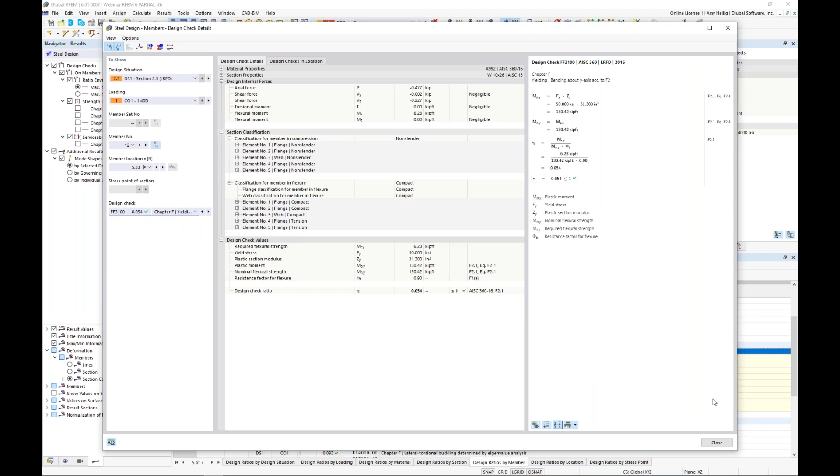So we can close out this, and notice everything is shown to us graphically here. Again, the table syncs to the navigator. What else you'll notice is that we're showing the mode shape that was used in the background to calculate the critical buckling mode for the lateral torsional buckling.

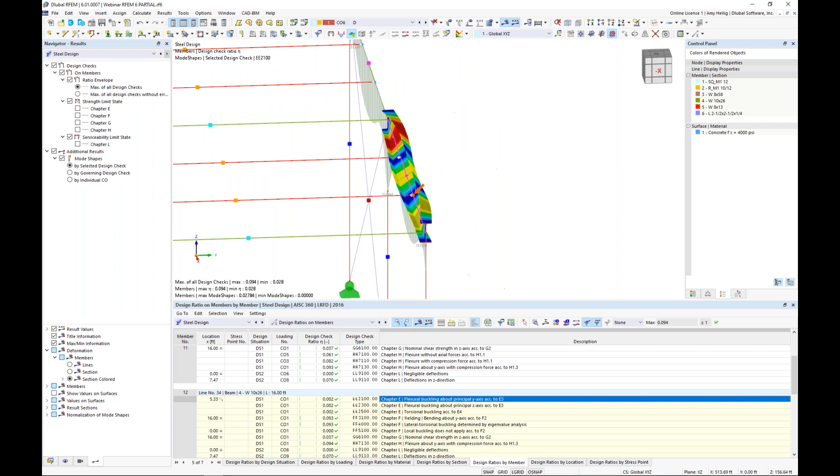So this is actually showing us the failure mode of this particular element, taking into consideration those intermediate supports that we previously set. Hopefully this is a nice overview of how the analysis and design portion can be run together within RFEM 6.

Now, I know we only have a few minutes left. I want to cover the printout report and maybe a few new options there. Up in our toolbar, we can create a new printout report, and up pops our printout report manager. This gives us the ability to turn on and off all of the different input data and results. Once you have this set for what you plan to use for your company, for all of your models, go ahead and save it as a template.

So you don't have to set this information every time. You'll also notice you can load a few default saved templates, which will use template number 1, the input data and reduced results for today. When I click save and show, this will launch our printout report, which is a completely separate application.

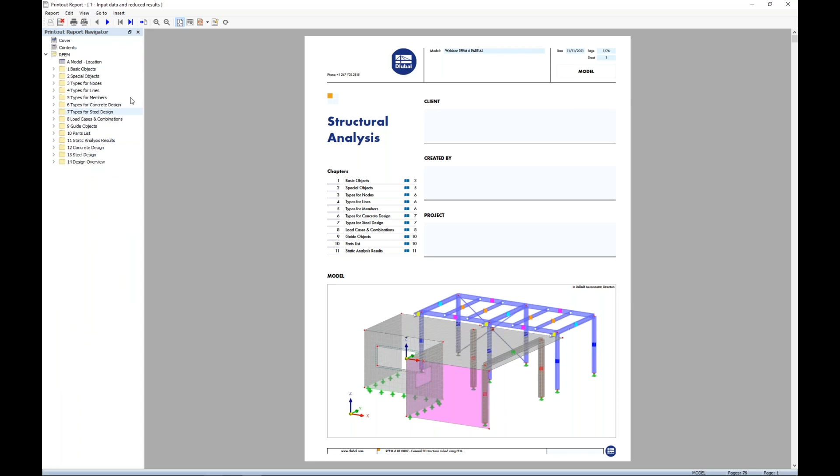You'll notice we have all of our chapters defined over here on the left-hand side. I'm going to collapse these. I know it feels a little overwhelming, but they're categorized in various chapters. One important thing to note is that I can move this printout report to a separate monitor and continue working in RFEM, deleting members, changing around my design, and this printout report will update in real time. All pictures, all data, so I don't have to refresh it. The program has the intelligence to update that printout report.

Now, this cover, I can right click to edit it. I can change logos, any of the information that I've seen here. What's also relevant is our pictures. We can always right click on these pictures to edit them.

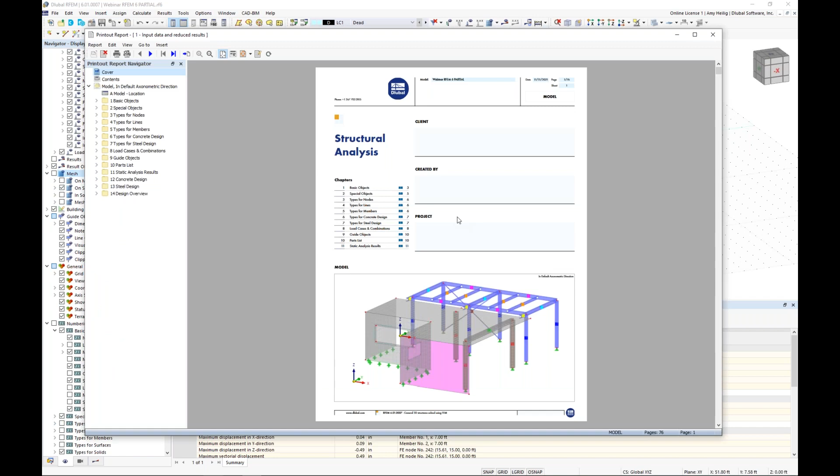This will bring us back into RFEM. And if I decide I really would like to turn off my member representations, well, I can go ahead and do so by graphically changing that modification here. Maybe I want to turn off my FE mesh, so I'll turn that off, and I'm going to rotate around the model. I kind of hit that too soon, so let's go back to the edit.

I only want to change the size of the window here. So I'll select these two elements to zoom in, and I'll be able to select my window that will be encompassing for that cover page. I click OK, and now we can see that this cover picture will be updated, not showing those member representations or the FE mesh. I rotated it around. So again, that's true for every picture within the printout report.

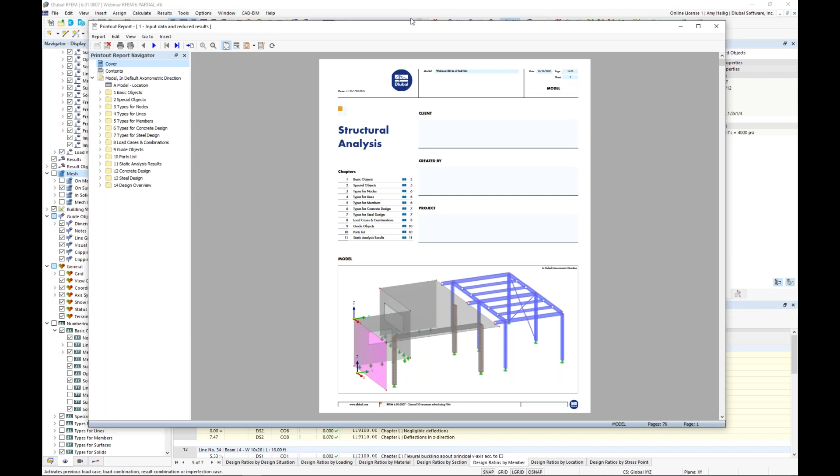If we go back to RFEM and we'd like to add our deflections as a graphic, let's jump back to the static analysis. We can turn on our global deformations here, and I'm going to zoom in. I'm really interested in printing off the global deformations for every load case and combination.

Typically we would come up here to print the graphics to the printout report, and I might be thinking, okay, I'll do it for dead load, come back in, do it for live load, and so on. But let's take advantage of some of the various settings we have. First, I'm going to change the height to 50%. Also, I'm going to take advantage of what's called the multi-print.

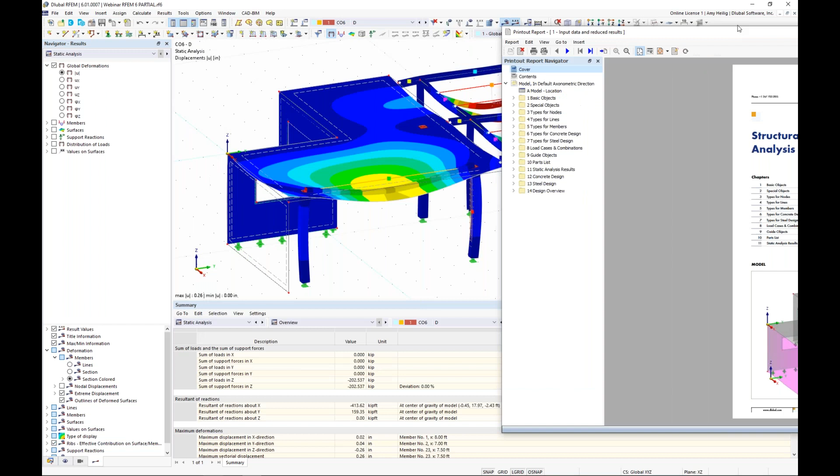So now with the multi-print, I have additional tabs here up at the top where I can go to my results, for example, and turn on the deflections for all 15 load cases and combinations. Now when I click save and show, you'll notice the progress bar at the bottom runs through each one of those load cases and combinations. Now you'll notice all of my pictures are shown automatically for all 15 load cases and combinations. Again, if I make any changes to the model, these pictures will automatically update.

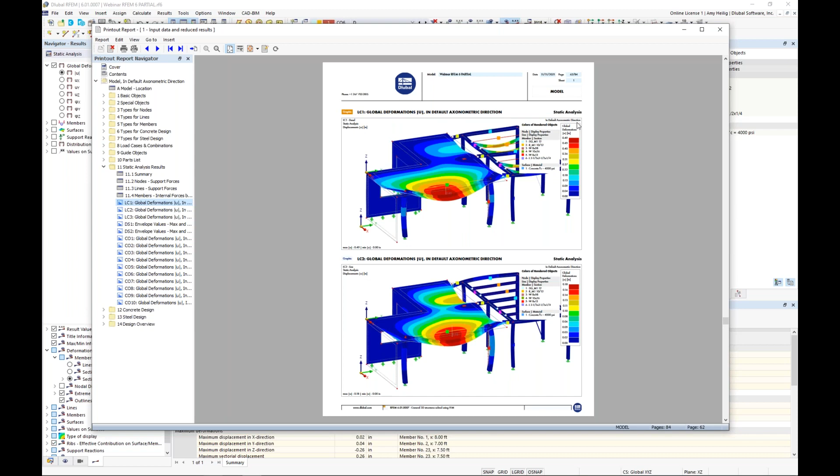Let us turn now quickly to one other topic within printing out graphics. If I take a look at my surface up at the top and create a visibility by selected object, viewing it in the reverse Z direction, I'm interested in this surface and the MY forces. So I go ahead and turn those on, and I also turn on the values on my surface, showing the values at each grid point for the MY value.

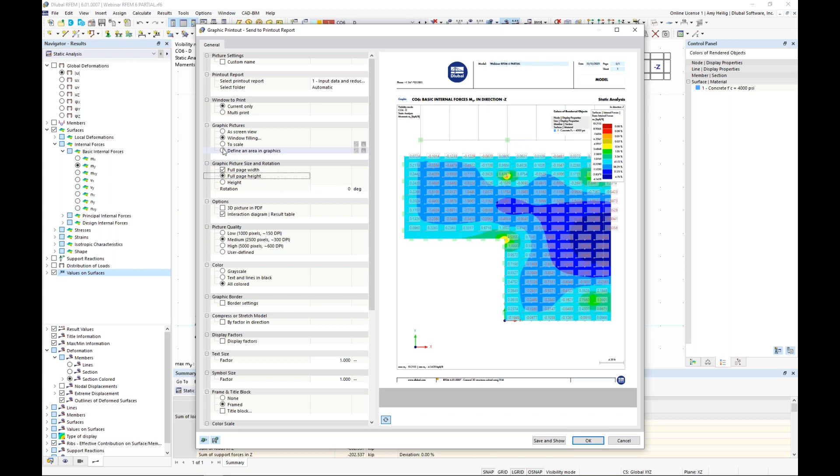I'd like to print this off to my printout report as well. So if I go to print the graphics to the printout report, the problem is that if I choose the current view only, this is pretty small, and I can't really see what I'm looking at. So what we have the ability to do here is actually scale this picture, and I can choose a scale ratio of 1 to 25. That looks much better, but now we're missing a significant portion of the rest of the structure.

We've added in this feature called tiled pictures. You'll notice the program has created 6 pictures that will essentially be stitched together, which we can view in our printout report so we can see those settings in closer, better detail. If I click Save and Show, we can see the printout report automatically updates, and now we have those tiled pictures shown to us here. So that's also a beneficial feature.

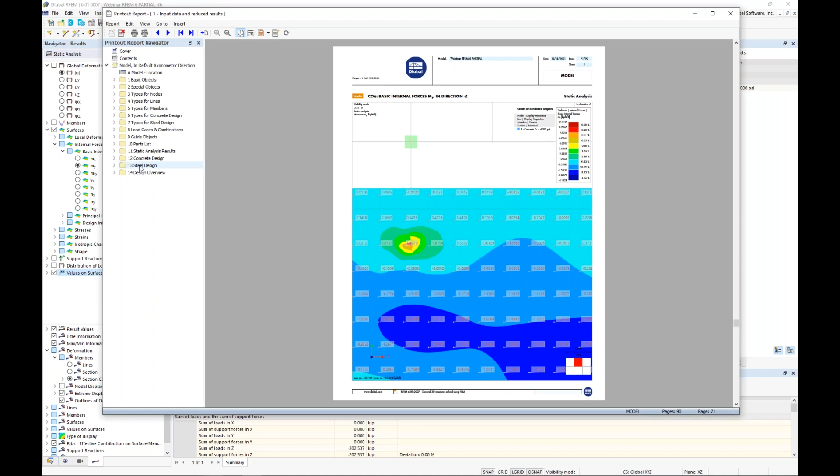The final thing to mention is inserting additional pictures you have saved to your computer, or PDFs. Let's say under the steel design, I want to incorporate a few pages from the AISC 360. I can right click under my steel design chapter and insert an image here, or insert a PDF below the item. So when I choose this option, I can navigate to where I have my PDF saved of the AISC 360.

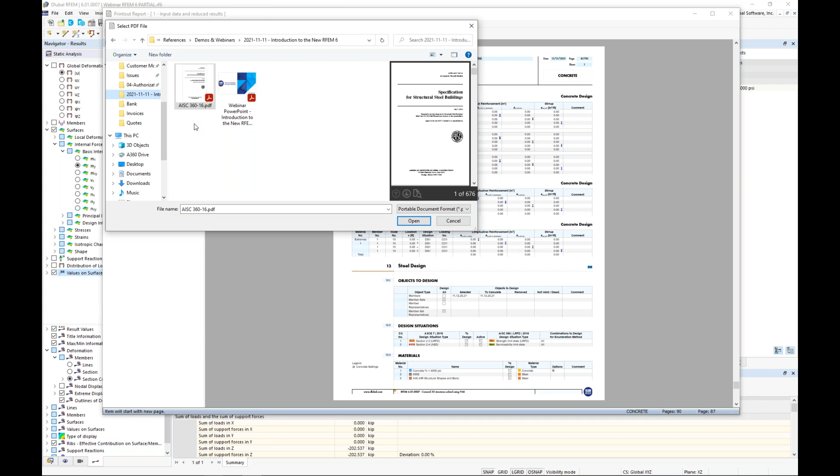I'm going to go ahead and print off some pages there. Now, I don't have to print off the hundreds and hundreds of pages and insert them into this printout report. Rather, we'll choose pages 102 through 103. I click OK, and now you'll notice when I expand out these details, the program has automatically integrated the PDF from the AISC 360 directly into this printout report. So this can be really helpful again for additional images.

Maybe you have separate technical papers you'd like to incorporate, but then we can transition right back to where we were here with the steel design within RFEM. You can create new chapters, you can edit new chapters. If I want to move my steel design before my concrete design, all you need to do here is just drag and drop. The program will automatically update. So really powerful now in terms of our printout report, and many new features that will hopefully be helpful for you guys.